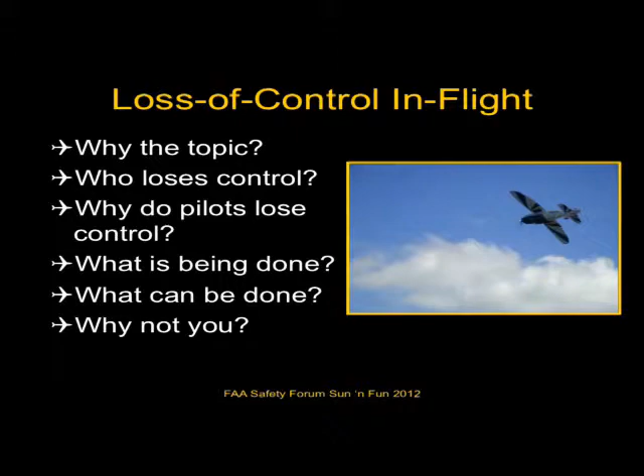And then we're going to say why, from a cognitive and from a flying standpoint, do pilots lose control. And probably most importantly, we're going to discuss what can be done for this potential problem. And we're going to give you some examples of what has been done, what is being done, and what can be done. And the bottom line becomes, once we present this evidence, why not you?

Okay. So I would like to bring BJ up. We'll be teaching this together, and BJ's going to give a definition of really what is loss of control in flight.

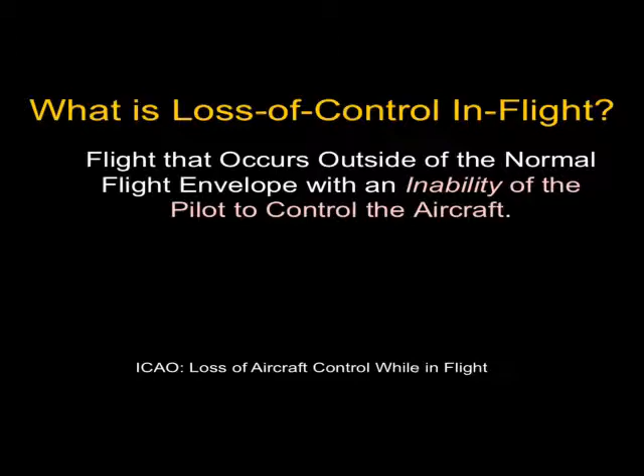Thanks, Janine. An important topic in loss of control is really understanding what it is. Often there's confusion between what an airplane upset is and what loss of control is, and in fact one can lead to the other, but they don't necessarily have to follow each other. And one definition that we have here is that flight occurs outside the normal flight envelope with an inability of the pilot to control the airplane.

So I think what we want to talk about is what is meant by a normal flight envelope, and when we say inability of the pilot to control the airplane, it doesn't necessarily mean the airplane isn't responding to their inputs. It's the inability of the pilot to properly stop the flight path divergence. In other words, to get the airplane to do what he wants it to do as the end result. So let's talk about the envelope. So how do we define it?

Well, one definition by the Airplane Upset Recovery Training Aid, even though there's a variety of them, for commercial pilots can be as little as 45 degrees of bank and a pitch of 25 degrees nose up and 10 degrees nose down. Now, this can vary based on experience, the type of airplane you're flying, and the type of background that you have. But at the end of the day, what is a parameter set that you can have as a pilot where you need to realize whatever you were doing before doesn't matter, and now you have to regain control of the airplane.

Now, that's just one aspect. That's pitch and bank. And there's another one in this same definition; it says, or within these parameters, but flying at airspeeds inappropriate for the flight conditions. And that's kind of a broad statement. And a little bit later, I'm going to get into some graphical analysis of what this implication is.

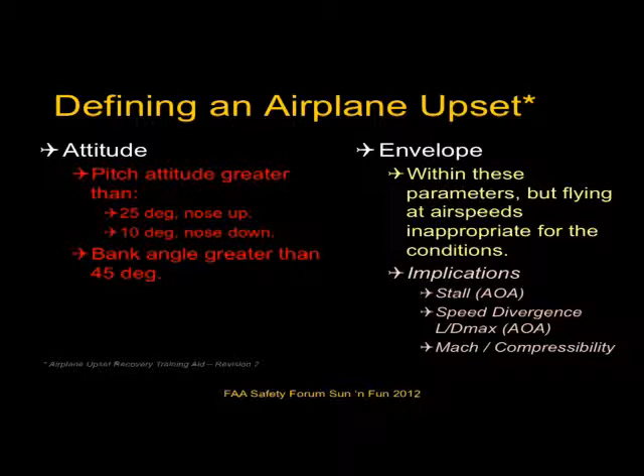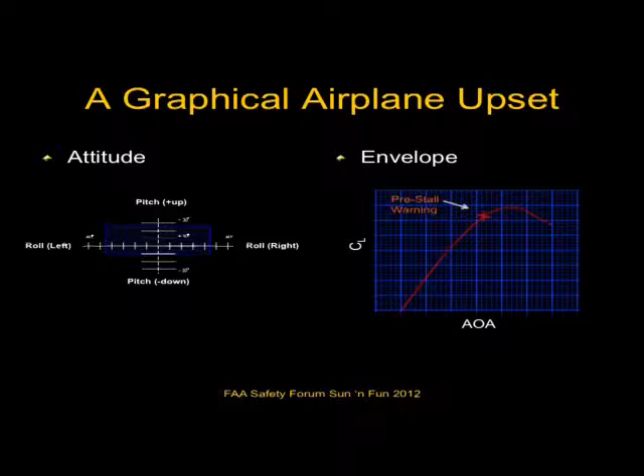But to show you these two statements graphically, we take a look at the pitch and bank of an airplane. We can see that it's a tiny window of about 45 degrees of bank, 25 nose up, 10 degrees down. And in the envelope, that normal lift curve. I want you to remember that diagram because I'm going to be coming back to talk about it. The X that I put on there is typically the indication that pilots have to realize they're starting to get themselves into trouble in relation to the flight envelope.

And that can be represented by a shaker, a light, a horn, or whatever type of warning system the pilot might have. And what we're going to do is come back and talk about this and hopefully give a better meaning as to what the risk factors are and what awareness a pilot can have to know that they're getting themselves into harm's way.

Some evidence. Why are we even talking about this topic? First of all, I want to give a little history. In 2005, I had the opportunity to talk here at Sun and Fun, and the title of the presentation in 2005 was Losing Control of a Perfectly Good Airplane. And I am going to tell you right now, this is the same stuff, different day, 7 years later.

As a matter of fact, the reason I even got interested in loss of control was a 1996 accident, when I lost 3 good friends in a DC-8 loss of control accident. They stalled the airplane and never recovered.

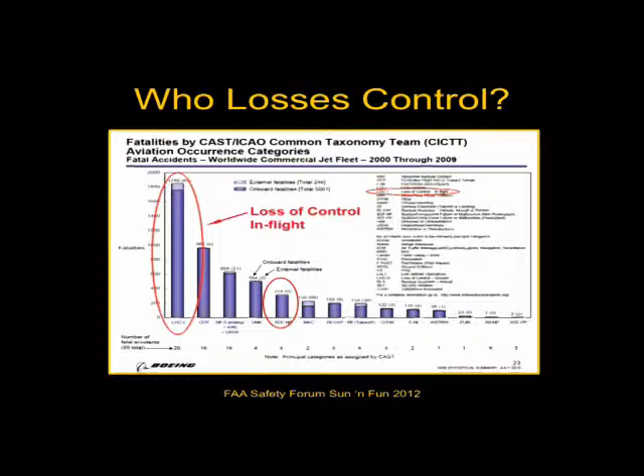Okay. So we've got high-profile accidents, and that's all well and good, and that may be what you read about in Flying Magazine and AOPA and your other publications. However, if we take a hard look at the statistics, at the real numbers, there's 3 points we need to make here, as not only who loses control, in that are they commercial pilots, corporate pilots, general aviation pilots, are they just U.S. pilots?

And one of the points we want to make is we're not saying these are bad pilots. This can happen to any pilot at any certification level in any part of the world in any type of airplane. So when our title this year is who needs upset prevention and recovery training, UPRT, it can be everyone. And we're going to come back to that a few more times as we talk.

But on this slide, we show in the commercial aviation realm, Boeing publishes accidents on commercial airliners every year and has been for many, many years, that loss of control in flight is by far the leading, you can see on this slide, the leading problem on commercial aviation fatalities.

If we include in that a failure of a system component or failure that's not the power plant, it can be any other system, that can also lead to a loss of control or maybe a contributing factor, or in the way we look at it, could be a precursor or the beginning of the chain of events that ended in loss of control. We certainly have many, many more accidents, fatal accidents and fatalities combining these two categories than all the rest of the categories combined.

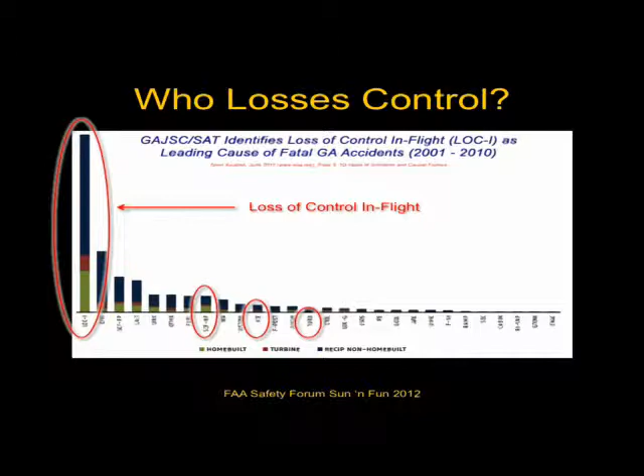Let's take a look at general aviation. The General Aviation Joint Steering Committee, Safety Analysis Team, that's all those acronyms, also found loss of control in flight to be the major problem. Okay? So this is general aviation. This is new data. Once again, we can look at the system component failure, the SCF, non-power plant. Icing and turbulence, precursors to loss of control. So we look at all of those categories together, and we say, gee, this is quite obvious, this is a problem. And BJ is going to talk a little bit later about how are we addressing that problem.

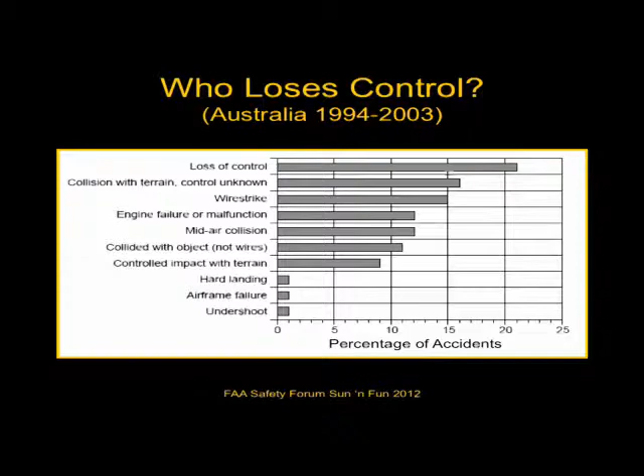Want to make a point that it's international. I just happened to choose Australia. These are some older data. However, same stuff in a different country. It's throughout the world. It's throughout every certification level. It is a problem in aviation. If you're thinking, well, of course this could not possibly pertain to me, I also pulled off some specific examples. Loss of control in flight. These are Australian. If you can look up here, there's an Airbus A340. There's a Robinson helicopter, R44. There's all kinds of different airplanes.

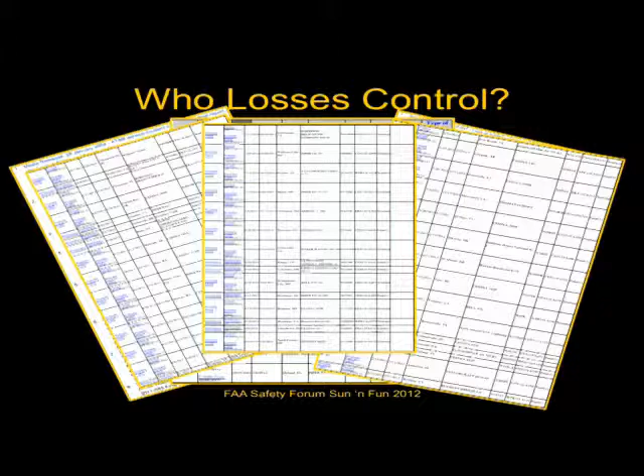Then I went back to the NTSB data, and what was quite interesting is I just looked at the last year. Wow, we've got a lot of different airplanes, a Beech A36, a Maule, a RANS S7, a Robinson helicopter. Oh, we have more just from the last year. These are loss of control accidents just in the last year in the U.S. Well, not necessarily in the U.S., but investigated by the NTSB. So you might find your type of airplane or helicopter or flying machine on this list.

Okay? And that's not to say these pilots were bad pilots that got themselves into this situation. However, somehow the chain of events evolved and got them into a loss of control in flight situation. And just by comparison, what are the chances of the next accident being a loss of control in flight? Well, first of all, it's 3.4 times more likely to be loss of control in flight than a runway excursion, exiting the runway unintentionally.

You may think of this as large airplane problems, but if you look at the data, you'll see how many times student pilots have a runway excursion, and oh, by the way, it's not usually on their first solo, it's generally on their second solo, when both the instructor and the student pilot have let their guard down, and all of a sudden they have a little bit of trouble on landing. We won't go into the whole discussion about perhaps they should be making full stop taxibacks versus touch and goes, but 3.4 more times likely to be a loss of control in flight.

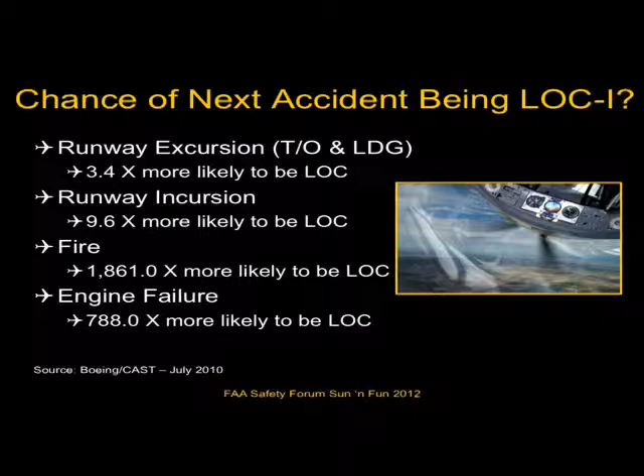How about a runway incursion? Almost 10 times more likely the problem's going to be loss of control. One of the reasons we are showing these comparisons is there have been big, big efforts in runway incursions. The FAA has been very, very diligently trying to address runway incursions, but on the other hand, it's 10 times more likely that you're going to have a loss of control in flight problem. 1,861 times more likely than a fire, and this is one that I find very, very interesting. 788 times more likely you're going to have a loss of control in flight event than an engine failure.

And throughout pilot certification, what do we do on every certification level? Oh, this is a simulated engine failure. Do we give them, this is a simulated flight control malfunction? So the example here is it is a problem and perhaps it's not really being addressed.

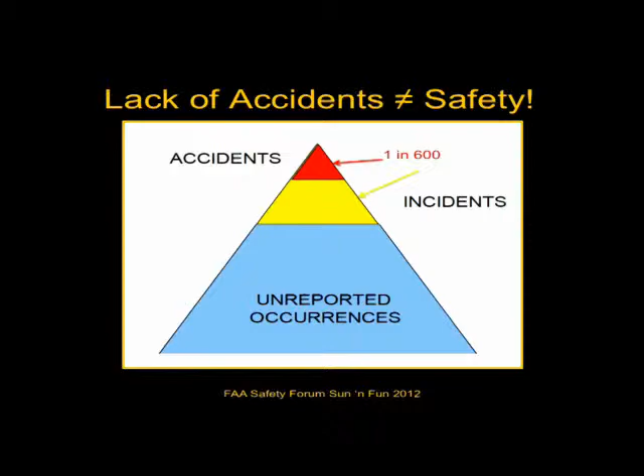Okay, one of my favorite slides. Those of you who have heard me talk before know I always jump up and down and say, okay, that's all well and good. That's accidents, that's fatal accidents. Accidents in and of themselves are not a good criteria, though, as to how safe the system is or how safe an individual pilot is. Because lack of accidents do not equal safety, because for about every accident, we may have about 600 incidences, 600 loss of control incidences for every accident that is out there.

The more important color here is blue. The unreported occurrences. Every time that it's, oh my goodness, I got myself in a really bad way and I'm really lucky I got myself out of that situation, nobody ever knows about it, and we don't address it, and we don't go back for further training to make sure that next time we find ourselves in that situation, we are sure of how we can get out, or better yet, that we have the training and the academic knowledge and the flight training to not even get ourselves in that situation, or at least stop it before it becomes a real problem.

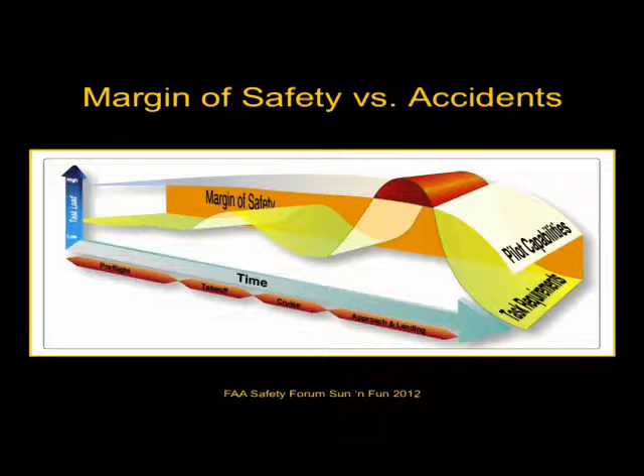Which brings up a very, very familiar slide. I don't think we can wear this topic out. We're looking at the margin of safety. Once again, we're not saying that pilots are not good pilots, but what we are looking to do is increase that margin of safety against finding yourself in a loss of control in-flight situation. And as we see, your margin of safety throughout a flight over time, from pre-flight all the way through approach and landing, does change. And as we know, approach and landing is usually the highest workload and the highest probability of having more workload than the pilot has capabilities. But the point here mostly is the margin of safety throughout a flight to increase or decrease the chances that you will end up in a loss of control situation.

A little bit of background. Some academic research that's been conducted over the last 15 years on unexpected events and surprise fits very well into this topic, because if we look at how pilots think and how they're responding to situations, we find that an unexpected event or surprise can alter your thinking, and it does.

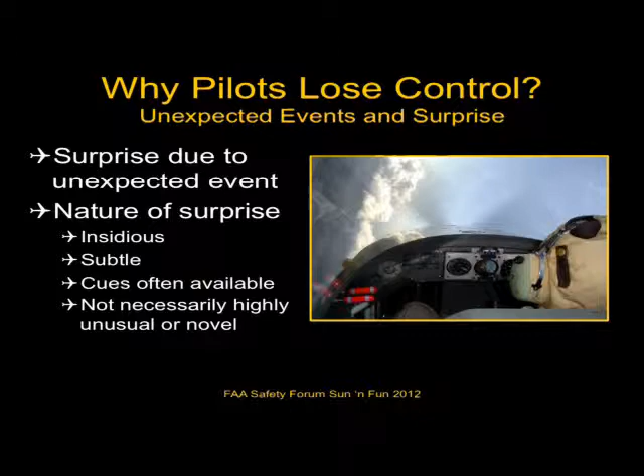But the first thing we need to note is surprise is not necessarily some catastrophic event that all of a sudden there's an event and you are out of control. You have lost control of your airplane. That's not how it happens. It usually creeps up on you. It can be subtle. And there are often cues or clues available to the pilot that there is an impending problem. You can watch the hydraulic pressure decrease, and you can start projecting into the future using good situation awareness that, if I'm going to lose my hydraulic system, then that means I'm not going to have this component or this component.

And then it's not necessarily a novel event or something that hasn't been seen before, but what happens is we now are in a situation where we take a look at the situation and we may not predict how that might affect us. We don't predict it far enough into the future that now I don't have my hydraulic system and I'm going to be distracted, and my decision making may even become impaired or delayed because I'm focusing on this little, maybe a little situation, it may be a more serious situation, but I'm becoming distracted

and it's interrupting my ongoing activities, which, when we look a little bit further, can lead to not paying attention to what we're doing and losing control of the airplane. So that interruption, and there's quite a bit of research out by Key Dismukes and others on interruptions and distractions and how that affects our performance, that leads directly into loss of control.

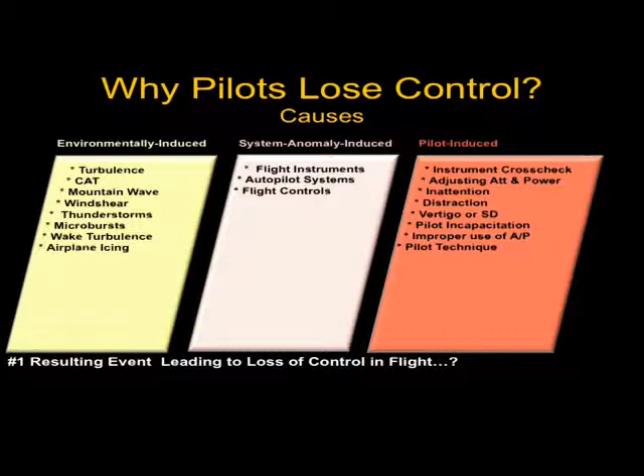And then we also have pilot-induced causes. Once again, I've already talked about inattention and distraction. There are a number of items here that could lead or be a precursor to loss of control. However, the #1 resulting event leading to loss of control in flight. Anybody want to guess what it is? The #1 event that leads to loss of control in flight. Base to final, what?

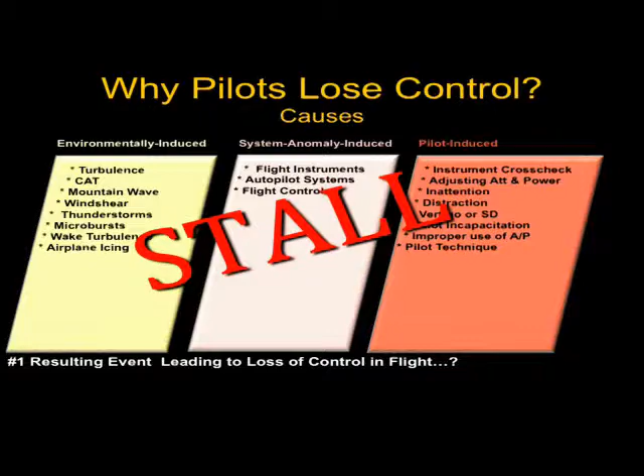Very good, stall, absolutely. So these precursors, we're not paying attention. We've inadvertently gotten ourselves into a stall situation or a stall spin. And you're saying, well, we practice stalls. We learn how to do stalls and recover from stalls. Don't get me started on that topic. BJ will talk about it.

But what we have found is we can mitigate this from the very beginning through both skills and knowledge, being aware of the situation, being aware of the threats, and specific targeted training. Because I only have to ask one question. If we're doing our training right and we're doing our pilot certification correctly and we're evaluating pilots and their skills, knowledge, and abilities correctly, then why do we have so many loss of control in flight accidents? So I'd like to turn this over now because I've asked that question, and BJ is going to talk about what can be done.

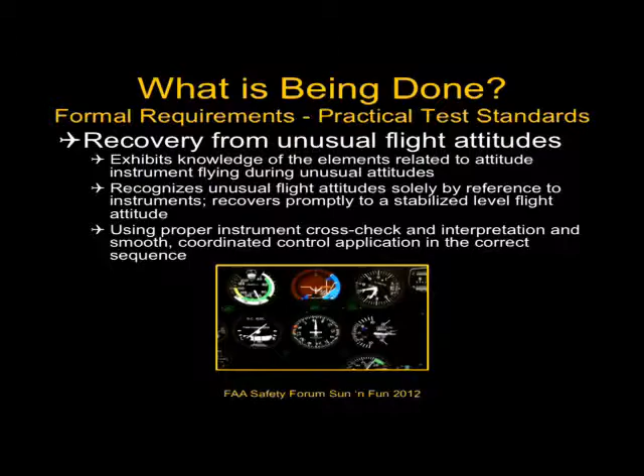And as we all know, we are doing variations of loss of control training, for example, unusual attitude recovery training. Anybody who's been out there doing it, it's relatively benign, but this is just an excerpt from the PTS as to what's expected and what performance a pilot needs to have. Now, if you take a look at the image in the bottom center, you'll probably agree that if you're doing training properly and legally and safely in non-aerobatic airplanes, you have never seen a situation like you see there.

And that's just one example of an excursion of the flight envelope that we're going to talk about in a few minutes. But to just repeat what Janine's saying, we can't get away and focus too much on recovery. Even though recovery matters, really our hallmark of training needs to be awareness and prevention. And that's something that needs to be continuously emphasized as we go through this discussion.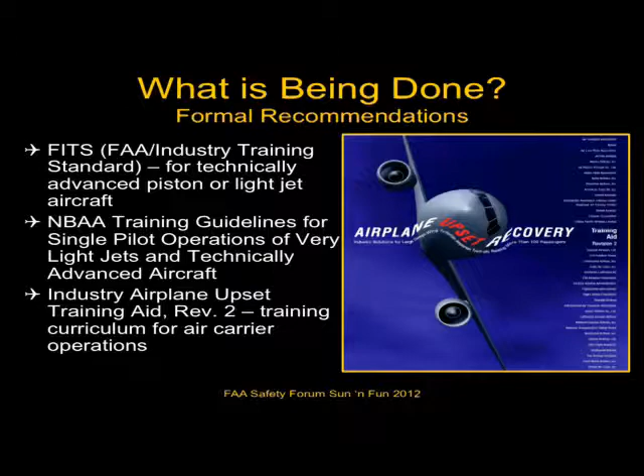So what is being done? There's a variety of industry groups. We kind of pulled an example from each area of aviation: general aviation, the FITS program, the NBAA training guides in the corporate world, and probably the one that we pulled a couple references out of here is the Upset Recovery Training Aid Revision 2. Documents recognizing the fact that loss of control needs to be addressed, it needs to have improved training, and taking efforts to do so. So if we look into the industry as to who's active in doing this, they're going to try to intervene in this particular threat by applying upset prevention and recovery training.

Some working groups going on right now, a hot topic with ICAO. They're now looking at rewriting the MPL. They have a draft version in process to help them with their definition of what upset recovery training needs to be. ICATEE is an international committee, aviation training in extended envelopes for the Royal Aeronautical Society, looking at this period at loss of control, upset recovery. UPRTA, Upset Prevention Recovery Training Association, international policing agency for upset recovery to control quality standardization of instructors and program delivery.

We saw some statistics from the GAJSC as well, and whether you're aware of it or not, Congress has mandated that the industry look into solutions for the stall stick pusher and upset recovery regime of training. So there's a lot of activity going on to try to make a difference in this threat that we're seeing. So we need to realize, even though prevention is important, even though licensing training is excellent, there may be a hole we need to be aware of, to make sure that we're tapping it and taking advantage of the resources we have today that are readily available to make a difference.

So there's some examples of people out there doing it right now, just a couple, there's many more. We talked about the MPL. It's always been a requirement since it was instituted, but the way it works in MPL is it's a one-liner right now in Annex 1 that says upset recovery training will be provided, but there are no details as to what it is. Well, that's about to change. It's going to be defined in great detail as to what's required.

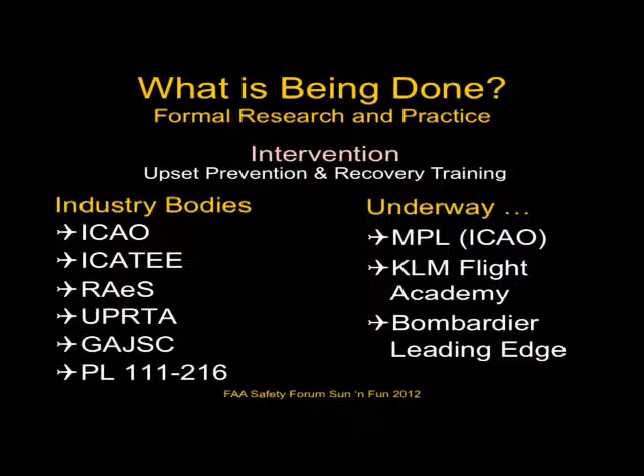Kind of setting a precedent in the airline world, KLM Flight Academy now requires its students to have upset prevention and recovery training before going to the air carrier. Bombardier's Leading Edge program has been doing this for a long time, since the late 90s. Right now they're following an integrated program of online academics, instructor-led, on aircraft, and full flight simulator training as well, to give their pilots an added edge and be able to mitigate, prevent, and if necessary recover from a loss of control event.

So let's now go back to the diagram that I had initially. I just want to put this into perspective because the big question is, if our licensing training is excellent and pilots are excellent, well, what is the problem?

Certainly there should not be loss of control. So what I want to talk about now is the upset, because everybody reads upset as loss of control, and I alluded to this in the beginning. Well, the upset definition that is a little bit tough to see up there is that same box I showed earlier: 45 degrees of bank, 25 nose up, and 10 degrees nose down.

Now let's take a look at the limits of licensing training, at least legal licensing training in a non-aerobatic airplane. We now expand that envelope out to 60 degrees of bank and 30 degrees of pitch. That is typically where you see training occurring, because to go outside of those parameters, number one, you start needing a parachute, and then it starts getting into potentially the definition of an aerobatic maneuver.

So if we are looking at the airplane upset as the definition, in other words, the edge of the blue box where the pilot, like I said before, has to forget whatever else they were doing and now recover the airplane, you can see that there is a certain buffer region around it where they've been exposed to in the past, limited by that licensing parameter that I have up here. The problem is that represents barely over 10% of the all-attitude envelope.

So if there's any event that hurls them outside of that region into the red region, then it can become a very severe situation. And that's nearly 90% of the all-attitude envelope unaddressed through licensing training. So does that mean we have to change all of our training to spend 90% of the time dealing with that area? Absolutely not. That's not the point. The point is if a pilot gets hurled out into that region, it'd be one thing if their skills were transferable. The problem is they go out into that region, and what they typically do day in, day out can often make the situation worse, not better.

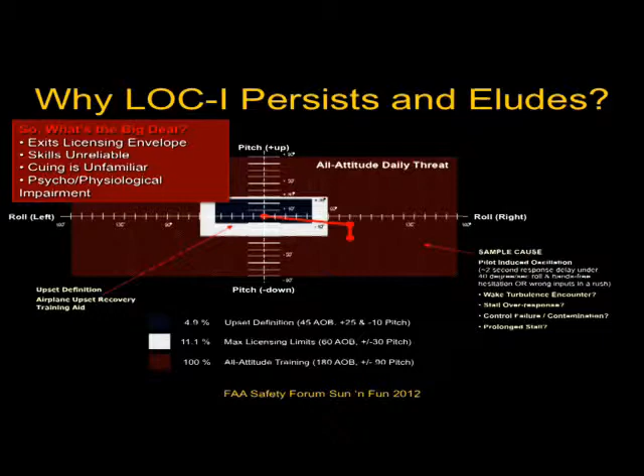So the big deal for pilots is that things start changing. It's exiting what they've experienced in the past. Their skills are now unreliable and may or may not be transferable. Their cueing is unfamiliar. Now they're having a combination of aerodynamic cueing, motion cueing, audio cueing, buffeting, a variety of things going on that they've maybe never seen cascading simultaneously before, that creates an impairment, both psychologically and physiologically, in the pilot. So it's essentially a snowballing effect, making the situation worse.

So let's now take a look at that graph I showed earlier. I want to show you a couple parameters. I know we're a little bit behind and I don't want to rush.

We often think that when we're trying to be safe in relation to the flight envelope, as long as we stay above the stall warning cue, we should be fine. And generally speaking, that is correct. But if you think about your daily operations flying point A to point B, you spend most of your time actually flying in the normal flight region, the non-slow flight region of your airplane.

And that L/D max cue that I have there is essentially a flight condition where, as we start getting below it, the handling characteristics of the airplane start to alter slightly, and we're getting into the region known as slow flight. As we start getting into slow flight and proceed towards the stall, we have a required certification to give us a warning we're going that direction, for the pilot to be aware and take preventative action to avoid the threatening situation.

The problem is that time and again, through real-life statistics, pilots don't stop there. Either they don't respond properly or they ignore the cueing because of all the other distractions going on when it occurs. The challenge now, of course, is when they exceed and go beyond critical angle of attack, the physics of flight change.

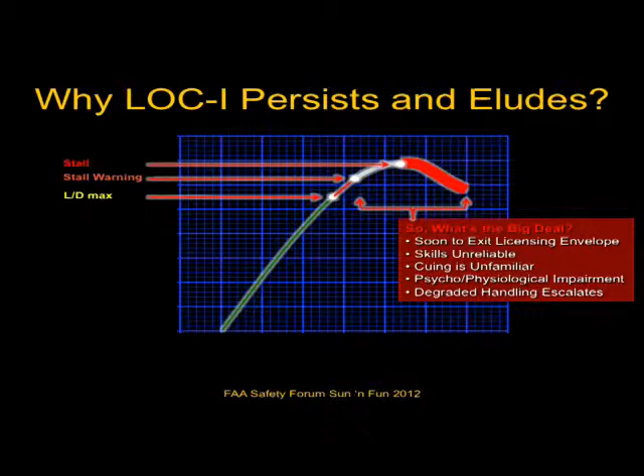And what I mean by that is if you think about your time in licensing, I'm not talking about aerobatic pilots, I'm not talking about pilots who spend a lot of time in this region, but if you're the general pilot who has had excellent licensing training, going to the full stall break might be only done when you're doing your initial pilot rating. After that, maybe as an instructor you see it, but as a commercial pilot, an ATP pilot, certainly as you get into the big airlines, your goal is to never go beyond the stall warning or the preventative indication. The problem is that's wonderful, except that it does happen, that people do go beyond that.

Just like in our previous slides, what's the big deal? Well, again, now they're starting to exit the licensing region. Skills are again unreliable. Cueing, the combination of all the cues, again distracting them, and then the impairment occurs. And probably the biggest thing, especially in the stall, and we're going to watch a video on this in just a second, is that the handling characteristics of the airplane are not at all the same in this region. In the red region to the right of CL max or critical angle of attack, they are very, very different than normal flight. Again, adding to the confusion, to the impairment, and the cascading effect of making it more difficult for the pilot to recover. So,

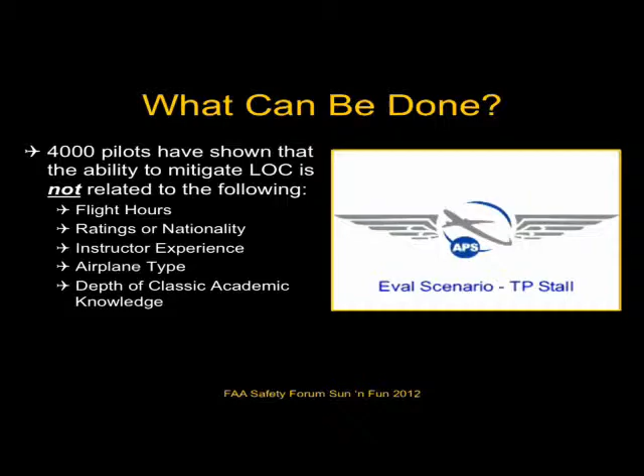We're unique in the fact that with our business, we've trained thousands and thousands of pilots. So what have thousands of pilots revealed to us in upset prevention and recovery training? Unknown to most pilots in the world, it really doesn't matter, from what we've seen, how many flight hours they have, how many ratings they have, what their instructor experience is, their airplane type, or their depth of classical aerodynamic or academic knowledge. We expected there to be a difference, but when it actually gets into a developed upset, as it exits that licensing region, the envelope, it becomes a level playing field.

For people who haven't had specialized training, just about everybody's the same in their capability. And that is near nil capability in actually effecting recovery from a certain threshold. And when I'm saying that, I'm not saying that there isn't excellent licensing training. The problem is when that doesn't stop it, there's no additional layered defense beyond that. The capability of a pilot to recover often is by accident more than on purpose.

Let's watch this video of a typical commercial jet pilot being surprised by the cross-controlled stall.

We're going to do a little scenario here, all right? Let's assume we're in your airplane. Do you have any pilots you like to fly with, by the way? Yeah. Are some of them less experienced than you? Oh, yeah. Well, let's say you've taken one of them flying with you, and he's flying the airplane, but you're pilot in command, of course. It's your airplane. And you guys are on approach. Here we are, turning base to final. You look off to the left and it looks like we're going to overshoot. And then whammo, this happens.

What would you do? Recover. Push. Power. Pull. Oh. All right. I have control. You have control. Wow. How much altitude did we just lose? Well, we lost a whole lot, didn't we? Yeah, 2,500 feet. And how high above the ground were we, turning base to final? Maybe 500 to 700 feet? Yeah, so we didn't survive too well on that one, did we? No. All right, we'll talk about that when we get back.

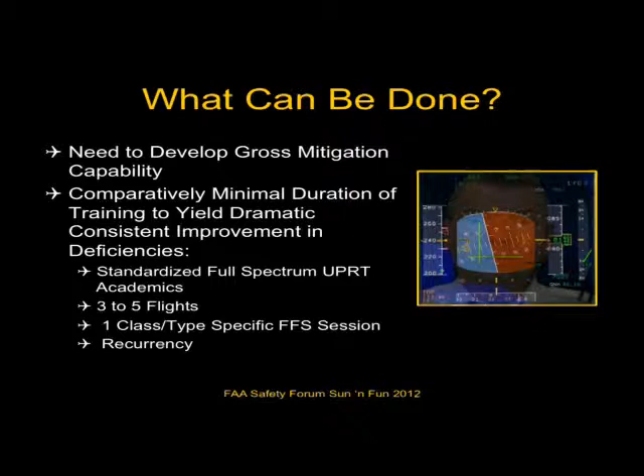All right, so what can be done? Well, we need to develop a gross mitigation. There's things that can be done in a relatively short period of time that can make a big difference for pilots, and it really kind of depends on what type of flying they're doing. It can be academic, it could be just simply on aircraft, or it might be an integrated program integrating a full flight simulator. The bottom line is that something can happen very, very quickly to make a big difference that can last a career in a pilot.

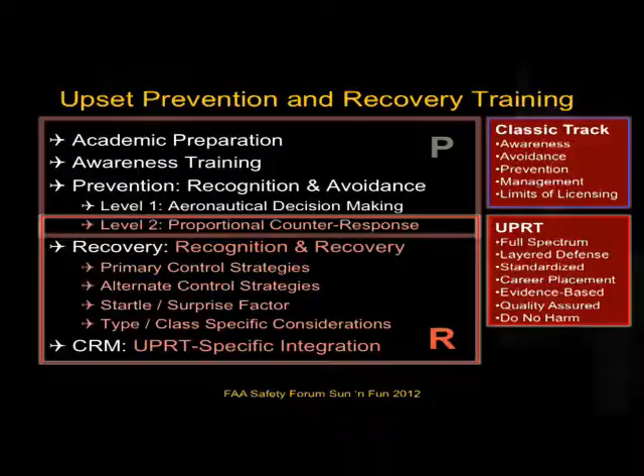The most important part of this added mitigation is to be sure that it's not negative training. It's very important that the skills that are imparted in training are transferable and useful, even if that pilot's going to go into a career flying business jets or airline category airplanes. So you have to be very, very careful of that. And I'm rushing past this slide just because I know we're running out of time. So if you want to think about it, upset prevention and recovery, that top box is generally prevention, and the bottom box is generally recovery, where CRM and SRM can permeate throughout the entire footprint.

Do we have time for this video, Judy?

Okay. So here's an example of awareness training. If we just learned from Janine that 50% of loss of control accidents are due to the stall, well, why would a pilot stay in that region? Let's just take a look at an exercise called the falling leaf exercise. And this is where the instructor is going to talk about essentially the cues and indications to the pilot that they're putting themselves into harm's way. And you'll hear the instructor say, we're not here to learn skills, we're learning awareness. So the intent of the falling leaf is not to learn how to fly an airplane beyond critical angle of attack. It's to recognize the cues and understand that they need to not be there in the first place and exit the region. So let's watch the video, and then Janine will be up.

Then you have the controls. I have the controls. Let's go power to idle. Power to idle. So I'm going to talk you through this. Just listen to my inputs, all right? We're going to hold the elevator back. I'm going to help you do that because you're not going to want to do it. Okay. But again, we're not here to develop skills. We're here to witness the instability of stalled flight, okay? All right. So let's go ahead and hold that elevator back. There you go. All right, that's it.

When the wing drops, just stop it with a little bit of rudder. As soon as it stops, get those rudders neutral. You can see it really wants to go on you, doesn't it? Yes, it does. Okay, would you agree that this is pretty unstable? It's completely unstable. All right, now what I want you to do is going to be one step, and it's going to be the push step, all right? Okay. And now push. That's it, one step. All right. And I have the controls.

You have the controls. So you would have to agree that if we get into a stall, we are fighting instability, all right? We really are. And what's creating it is we as the pilot have eliminated our margin of safety from the stall by pulling on the elevator. Okay.

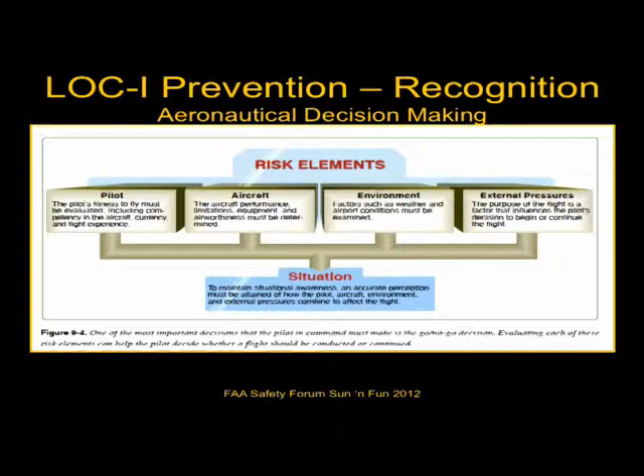If you remember the causes of loss of control, the environmental factors, the system factors, and correlate these to the risk elements, you can look at the pilot, not only your ability to fly, but the training that you've had, aircraft system anomalies as far as pre-flighting and knowing your aircraft, being able to predict and perceive the weather and the environment properly,

and also take a look at external pressures. If any of you were here this morning for Evan Burns' talk, many times he was talking about maneuvering flight and loss of control in flight. However, the external pressures and the thoughts that the pilots had and the purposes for getting themselves into the situation to begin with were not valid. So being able to deal with those external pressures and evaluate them.

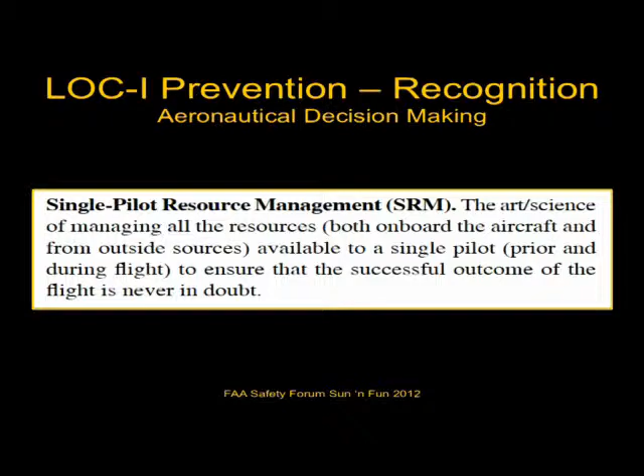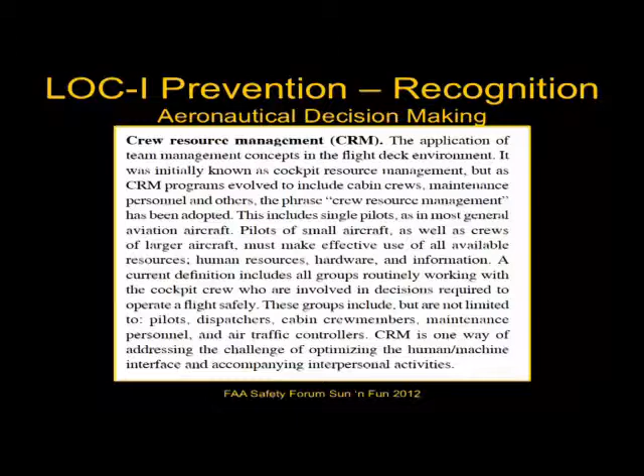And as we've talked about in the past over and over again, we talk about single pilot resource management, being aware of your environment and using all of the available resources. Crew resource management, of course, there's specific crew resource management training necessary for upset prevention and recovery training. And research has demonstrated over and over again that these need to be practiced in the simulator and/or in an aircraft and specific to the upset situation.

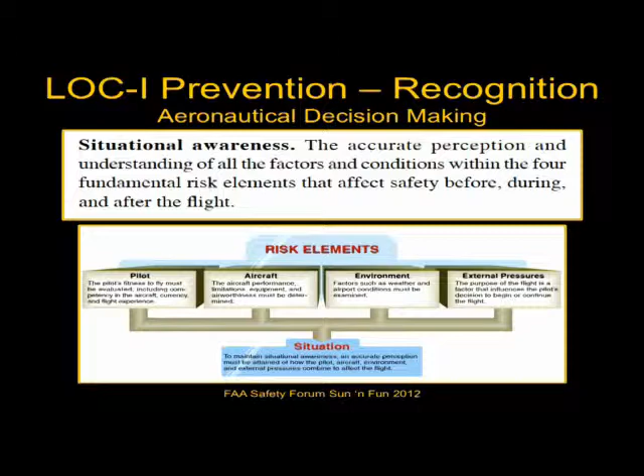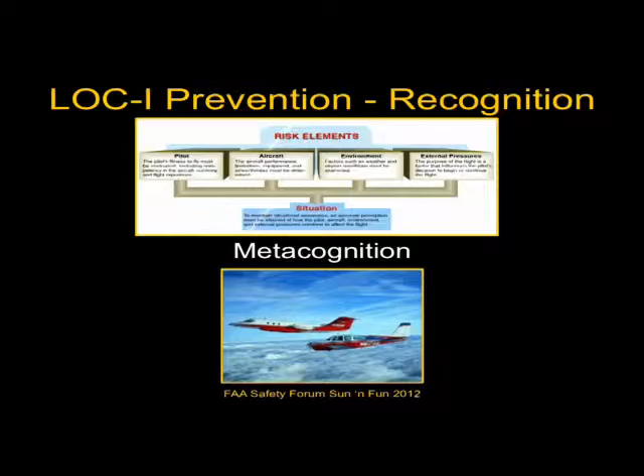But one of the most important factors that we can look at for prevention of loss of control in flight and recognize it is, once again, aeronautical decision making and looking at the risk factors. And I'm going to throw in my favorite word, metacognition, and I won't take up much more time once you hear this. Metacognition is thinking about what you're thinking about. Are you paying attention to what needs to be paid attention to?

And we use the adage all the time to aviate first, to pay attention to the airplane. Aircraft state, the state of the aircraft, is a major factor in loss of control. In other words, the state of the aircraft is unknown. The pilot just is not aware of his aircraft state, therefore he's not going to reduce the angle of attack at the appropriate time or early enough.

So metacognition, you need to pay attention to what you're paying attention to. And the second part of that is evaluating your own performance. Are you doing what's necessary to control the aircraft and keep it where it needs to be? The last item here, we'll bring BJ back up, and he's going to talk about if you don't pay attention, if you get yourself outside of the normal envelope, then you need to be able to recover.

So I just got finished telling you that prevention is the most important point until you have to recover. Then, of course, that becomes very important at that point. So what I wanted to do now is kind of a summary. I just pulled it from our previous chart on proportional counter response. That simply means that whatever event is being presented to you, you need to respond in proportion to it. In other words, you don't want to under-respond, you don't want to over-respond, you have to be able to mitigate and resolve it back into the heart of the blue box we talked about earlier.

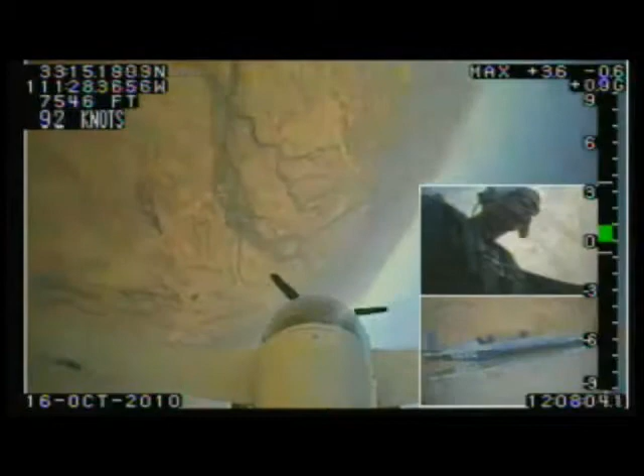Nose low, disconnect, push, power, rudder, roll, one.

Whether that be a multi-engine airplane, a business jet airplane, or a transport category airplane, well, that statement actually has a lot of validity because there's a tremendous amount of negative things you can train in a light aerobatic airplane for the business jet transport category pilot. However, if that training platform, the aerobatic airplane, is used to develop strategy and concept, then you can actually transfer a tremendous amount of information to help the pilot be more effective.